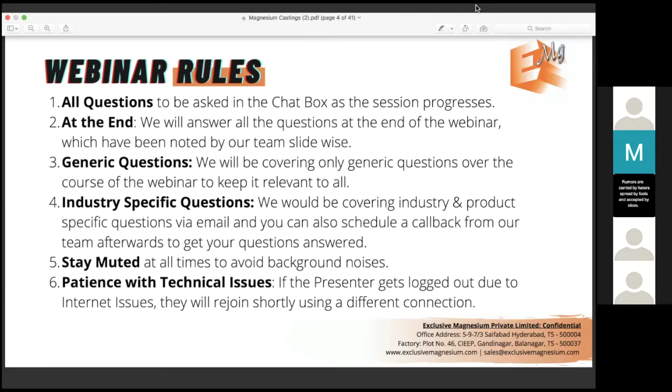We won't do any chemistry test here, but just wanted to let you know where magnesium stands on the periodic table. A lot of customers, when we approach them for the first time, ask us what magnesium is, so we thought we'll mention it up front. It's a structural material that is being used abundantly. It's an element which is very abundantly available in the Earth's crust. It is extracted currently through minerals and even through seawater extensively globally. It's the third most commonly used structural metal globally, and it's 100% recyclable. Even the waste product that comes out of a lot of the manufacturing can be used in other industries for other purposes.

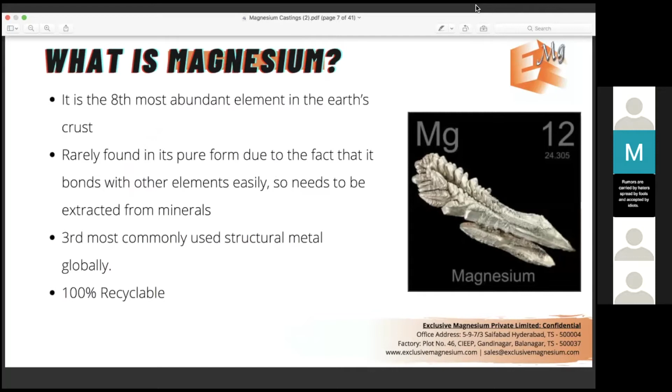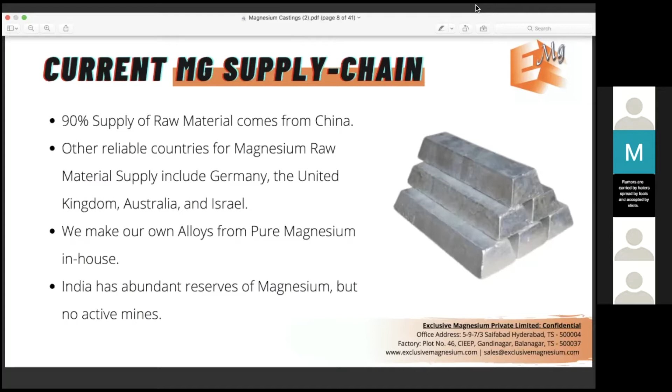So the current supply chain of magnesium, I'll cover this a little bit. 90% of the supply chain of raw material comes from China. The other reliable countries for magnesium are Germany, United Kingdom, Australia, Israel. There are a lot of options for alternatives, but 90% of the complete raw material is currently extracted in China, so they are the major source for this industry. We also, in-house, make our own alloy. So if we use pure magnesium, we combine it with the other elements to make the commercially viable alloys that are used for production. We're able to do that within India itself. India has abundant reserves of magnesium, but there are no active mines, so hopefully in the next decade, if that does come up, magnesium prices would definitely drop.

So when people talk about magnesium, they're not really talking about pure magnesium. Magnesium is then alloyed into different commercial grade alloys. When you talk about magnesium, they're usually talking about the commercial grade alloy, and they refer to something like AZ91, AM60, ZE41. These kinds of terminologies come in when you're talking about magnesium. I'll cover the three major series of alloys that are currently available in India, which you would have to deal with if you're getting into magnesium production at any point, or you're interested in magnesium, and the nomenclature, like how do you recognize what that means.

So as you can see from this presentation, this is the AZ series, where A stands for the highest alloy content in this alloy. On the right side you'll see a chart, a list of the alloying elements that can be used in magnesium, and you can use that to decipher what A means and what Z means. So that's aluminum and zinc.

The 9 and the 1 stand for the highest content. Nine, the first number, stands for the percentage of aluminum, the first element, the highest alloy content element. So that's 9% aluminum and 1% zinc.

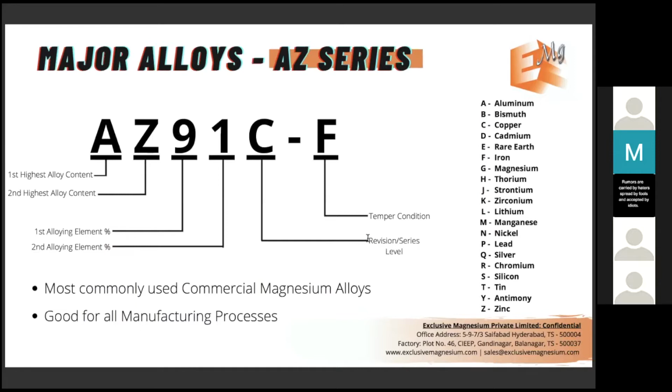And C stands for the revision series level. The alloys are constantly revised and the composition is improved constantly. So currently we are at AZ91E, but C is also commercially viable, D is also commercially viable, E is the purest form of that alloy, so that's also viable. But that's how you would recognize the alloy names. And F obviously is the temper condition.

So the AZ series is the most commercially used magnesium alloy in India and globally, and they're used for almost every industry, every use case. You would first consider AZ91 and then you would go to the others usually.

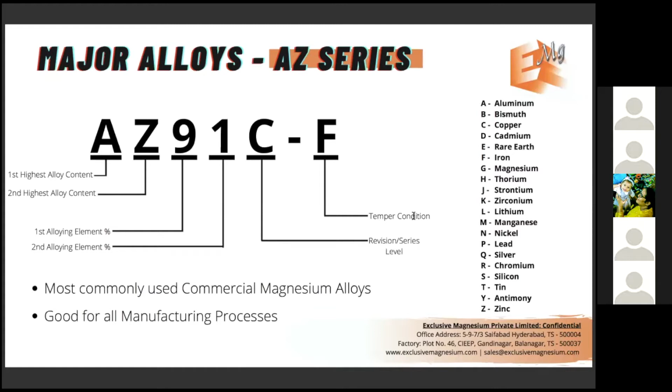The second is the aluminum manganese series, which is the AM series. This is extensively used in automotive and impact critical use cases. An example would be helmets, or steering wheels in cars. These are usually used with the AM series because they have very high damping capability - shock absorption, vibration damping, dent resistance.

So these are the use cases this series is used for. It also has very high elongation, so for alloy wheels - probably one more use case you can see.

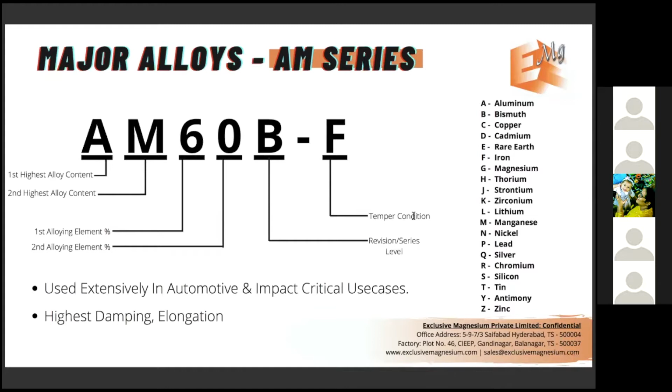The third major series used in magnesium globally are the ZE series, which is the rare earth series. So ZE is zinc, and E stands for rare earth.

This alloy is majorly used because other alloys of magnesium have lower creep resistance - at elevated temperature they're not great materials for engine use cases and things like that. So the ZE series, or the rare earth series - there are a bunch of rare earth alloys now which are used specifically for auto engines, aerospace use cases, which would be subjected to elevated temperature and need to maintain a certain amount of strength even at that elevated temperature. So anywhere between 200 and 350 degrees, you would get great strength from these alloys.

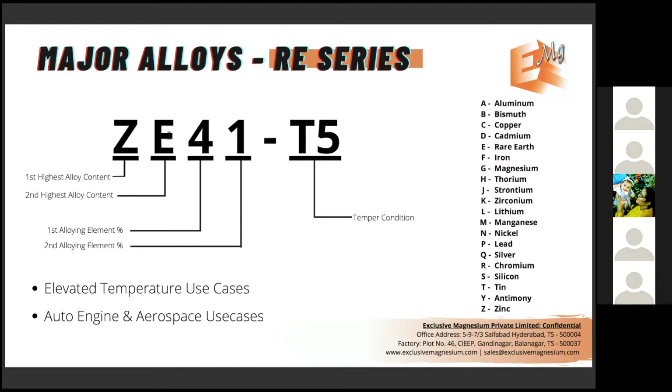So we'll quickly move to the advantages of magnesium alloys. I'm sure you must have heard, even with basic research, that the main use case of magnesium is lightweighting. The reason lightweighting is important is because the density of magnesium is significantly lower - it is 33% lighter than aluminum and almost 75% lighter than steel. That's one of the major primary use cases why people usually consider magnesium.

The second major property that customers are interested in is the high damping and shock damping capability of magnesium. Not only will it prevent damage to the equipment on drop, when it drops to the floor or during a crash, it's basically used in almost every vibration damping equipment.

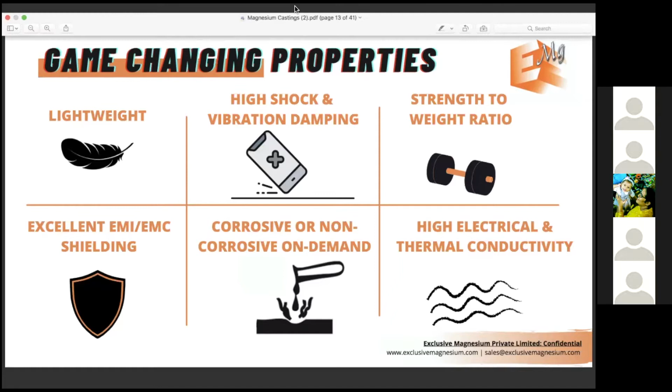Uh, I think someone needs to mute themselves. If anybody mute yourself.

Okay, sure. The third is strength to weight ratio. So even at very thin walls, you'll get very high stiffness with magnesium. Aluminum usually is recommended to have 1.5 or 2 wall thickness, whereas magnesium can be cast as low as 0.65. We've done 0.65 wall thicknesses, and even at that you get significantly good strength or stiffness, which is required for the use case.

Obviously, EMI shielding is an important secondary property that our customers require for electronic use cases. And a very interesting use case for magnesium comes with corrosion.

Magnesium can be made either corrosive or non-corrosive on demand. Currently, there are coating vendors that guarantee lifetime warranty on non-corrosion with magnesium specifically. And there are some use cases where you would want to make magnesium more corrosive by adding a few elements which will help the composition corrode faster.

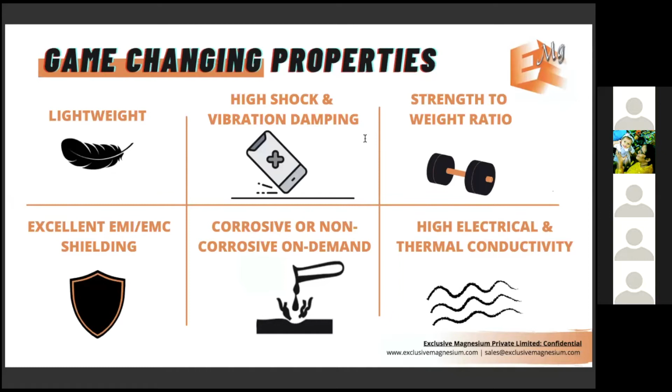Why do our customers approach us? I thought I'll cover quickly. Most of them are looking at meeting the industry customer demand trend. For example, they see that tablets are going down and customers are demanding lighter tablets, so they approach us while considering magnesium as the enclosure.

Or say they see a rugged laptop manufacturer. The second one is comparative advantage, where a rugged laptop manufacturer sees that their competitor's laptop is way lighter, and they would want to meet that, or be the first player making lighter rugged laptops. So as a comparative advantage, they approach us.

The third is where industrial equipment has a moving component subject to wear and tear and energy consumption. In such cases, a lot of machinery we provided heavy components made out of magnesium to reduce the energy cost, and also to improve wear and tear. The final one is something like the drone sector.

Compliance and standards are more related to emission standards, or weight limitations set by the industry. In the drone sector, there used to be guidelines that compliance and approvals are easier for drones when they're lighter, under a certain weight limit. So lightweighting becomes a priority at that point.

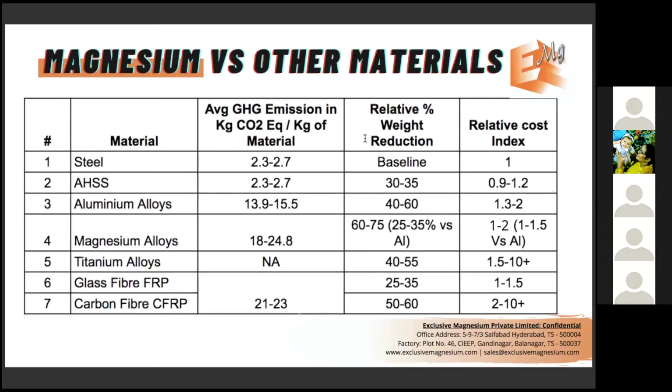So yeah, I just thought I'll quickly show you this slide. I'll keep it here for another 10 seconds.

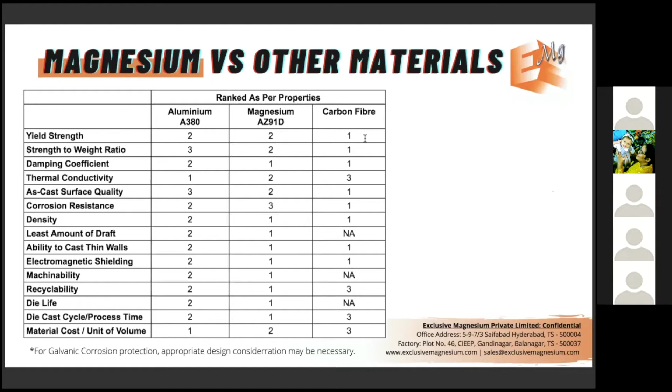When you look at ability to cast in thin walls, the least amount of draft during production, electromagnetic shielding, machinability, recyclability, die life, and the processing time it takes in context of die casting, that's definitely better for magnesium. I'll just stay on the slide for about 10 seconds so that you can go through it.

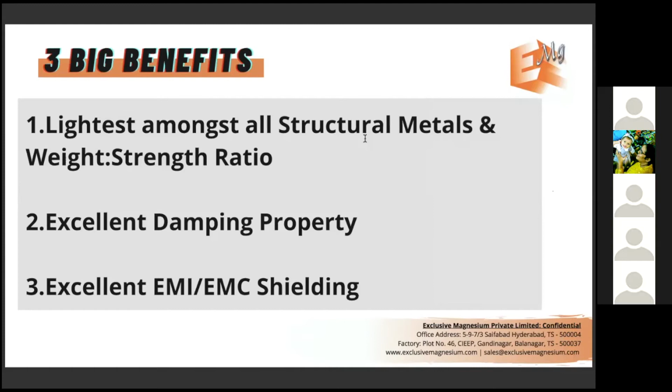So the three big benefits, I'll reiterate them so that you're clearer, and give you examples for each. The first one being lightweighting and weight to strength ratio: 33% lighter than aluminum, 75% lighter than steel. One example from industry is the Boeing 767, which saved 37,000 liters of fuel per year for every kg of magnesium it replaced with aluminum components. That's a major cost saving that is possible through something like that.

So that's one way we've looked at how lightweighting is being used by different customers. If you go back and Google the top 5 laptops of last year, take the name of the laptop and check what chassis it's made out of. Inevitably you'll see the majority are made out of magnesium chassis, and that's a global trend - globally best-selling laptops are starting to be made out of magnesium alloys. I believe customers will start demanding this in India too, and we've already seen it happening with a few consumer electronics companies we work with.

The last lightweighting use case is the wheel rim. Currently the standard in India is the aluminum wheel rim, but globally magnesium wheel rim is the go-to alloy. It offers anywhere between 5 to 7% increase in mileage, 4% plus improvement in braking and acceleration, and also a longer life for suspension and brake components. This is another lightweighting use case that automotive has figured out.

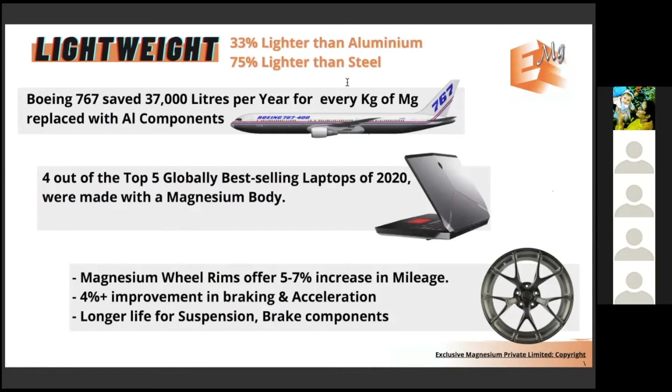Damping - I'll give three quick examples. First, vibration testing equipment. When you're making an electronics product, you want to do vibration testing for your component. Every vibration testing machine's components are majority made out of magnesium, because it offers significantly improved controllability, reduction in resonance amplification, and more reliable and accurate test results. Armatures, fixtures, slip tables of this equipment are made out of magnesium for its damping capability - almost every vibration testing machinery company in India takes some component from us in magnesium already.

When you look at laptops and rugged laptops, one major place where damping plays a role is protection of internal electronics. You're trying to make your laptop drop resistant and shock resistant, so there's no damage to internal electronics even during a drop. The difference in damping between aluminum and magnesium is significant - most alloys offer anywhere between 30 times to 100 times better damping than aluminum. That's something you should consider.

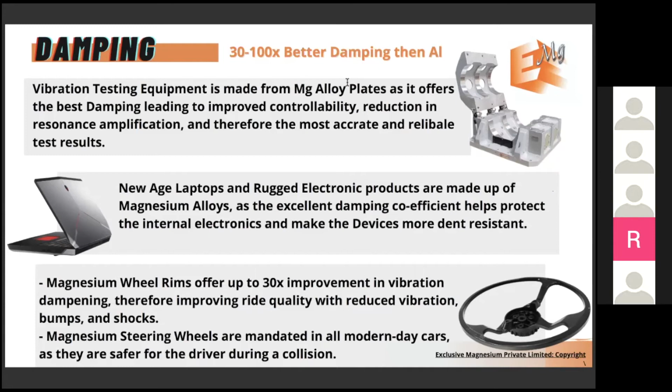Third, EMI EMC. Magnesium offers the best wall thickness to shielding ratio. Medical equipment has standards for controlling radiation and maintaining EMI EMC shielding, which is why magnesium is a globally go-to material in medical devices. Any IoT product, or even a drone, deals with extensive radio frequency interference, so magnesium offers a very good solution there. For the past 25 years we've been working with DRDO and ISRO labs, making enclosures for them, with EMI EMC being a secondary property requirement throughout.

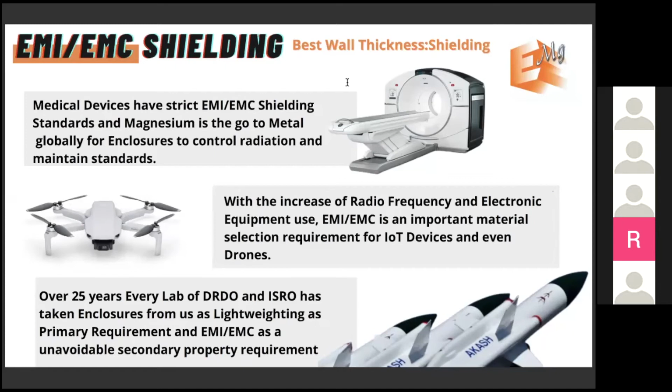Okay, the four misconceptions people talk about - I have to address this with almost every customer. One is about cost, that they believe it's too expensive. They believe magnesium corrodes too easily. They believe it burns easily or is a fire hazard, or raise concerns about creep resistance. That's the four major ones.

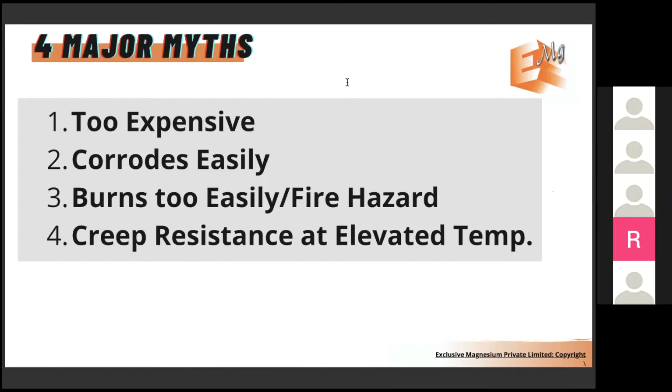If you look at cost, I'll cover it in four elements. One is the raw material cost comparison. Even though in this chart magnesium is slightly higher than aluminum and zinc, I chose magnesium, aluminum, and zinc because these are the three die casting alloys - structural component die casting alloys - so I thought it would be a good comparison. At the bottom you'll see the rate of casting as well, and there's a major overlap between all three. For sure, magnesium will be slightly more expensive at the die casting rate, but if you look at the raw material cost comparison, they're fairly close, even though magnesium is slightly higher.

If you look at the past decade of raw material cost fluctuation, you will see that magnesium is the most stable. Relatively, it has stayed stable and at the same price for the past 10 years, and it has not changed significantly. Whereas you'll see major fluctuations in aluminum and zinc.

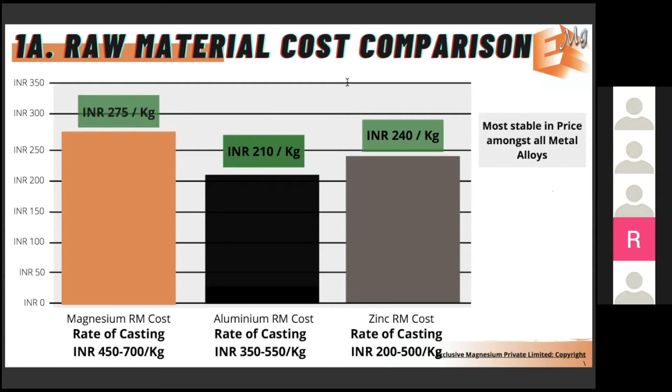So that's one aspect. In terms of production, if you take 1 kilo of magnesium, you are able to make three parts. What that density difference really means is that with aluminum you are making about only two parts, and with zinc you are making less than a part.

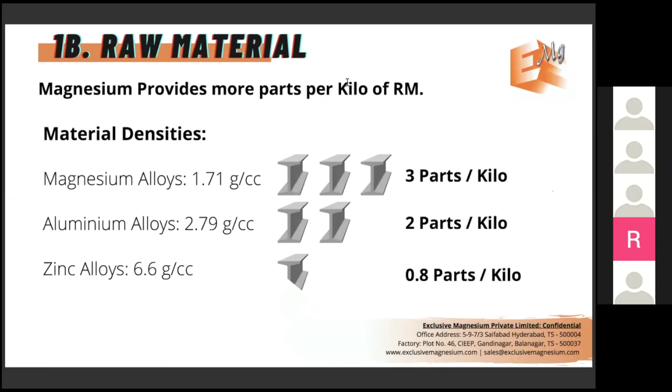So that's just how much better raw material can be used. Whereas the same raw material that is bought for higher cost, there's cost saving that happens during production in that way. The third major advantage in terms of cost, and this is more in terms of die casting, is that magnesium does not have any affinity to steel, hot die steel, and they are able to offer at least 2x or even 4x the amount of die life that aluminum offers for die cast.

So on an average, we promise customers double the die life than they would have got with aluminum, and that'll be almost 100% true every time.

And that itself, if you are a part of an industry which requires high volumes of components being produced, which go higher than say 1 lakh components of the same component, then directly you save almost like 10 lakhs. In this case, let's assume the die costed about 10 lakhs, which is like a reasonable price for a large component. You'd save easily about 10 lakhs right there.

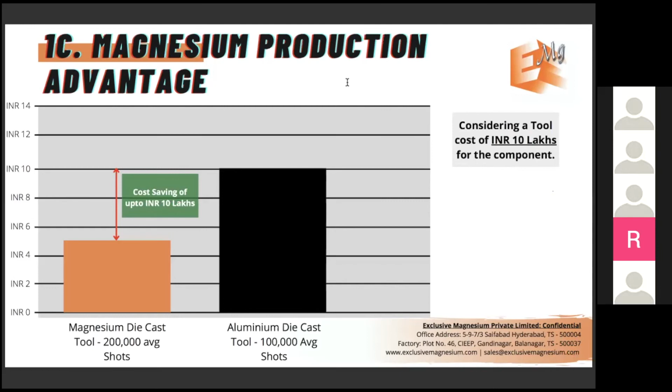The final part in terms of cost, I will cover in terms of stiffness. So this is if 1 kilo of metal is used in magnesium to create equal stiffness - this is the weight of the components at equal stiffness. So say something that would give you equal stiffness in magnesium in 1 kilo, you would require 1.8 kilos in aluminum, and you need 2.1 kilos in steel.

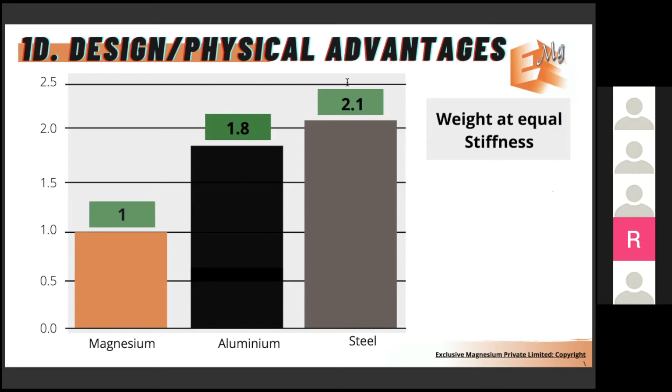So that's also one place that in terms of reducing wall thicknesses, you could also save raw material and price. So all these methods we've mastered over the past 25 years, and we help customers whenever they are open minded enough to approach us for transitioning to magnesium. That's something we help them with.

In terms of corrosion, someone had a question about corrosion just now in the chat box a while back. So this is just a presentation, a study that was conducted - a 10-day salt spray test conducted as per ASTM B117. This is not conducted by us, this is by a third party, and you would see that magnesium AZ91D has the lowest corrosion level in comparison to the other two options that are available.

So this is one reason why. The reason I'm mentioning it is because a lot of the understanding of magnesium comes from older data about magnesium, the capability of magnesium alloys. Whereas with the revision of the series of the alloys, the more purity we were able to create. Like say, iron, nickel - there are components in alloys which create that corrosion effect in magnesium. And when you remove those out of magnesium, they no longer are corrosive.

So now there's mastery in people understand how to remove those corrosive elements from that magnesium alloy and give you better corrosion resistance. And the second one I also mentioned about corrosion is that now in terms of coatings have become so good that there are companies that offer a lifetime warranty on coating for magnesium that we work with. One example being indestructible paints - that's one that gives a lifetime warranty.

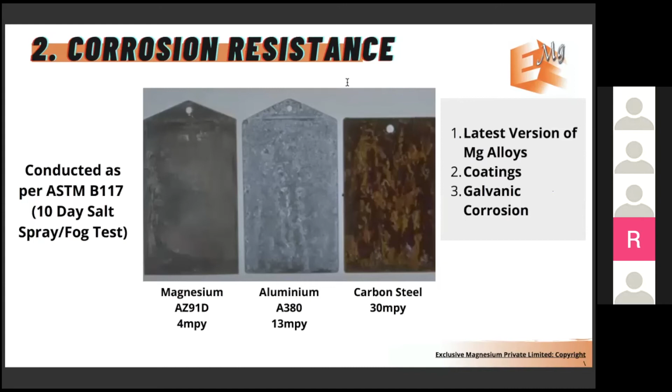The third major myth that we hear a lot about is the fire hazard. So one thing you should know is that magnesium is only dangerous when it's in its molten state, and when it's in powder state. Powder state, you would know, it's used in crackers. So that's majorly a powder form that is created and that you're lighting.

When you look at molten state, when it even comes in contact with moisture, it explodes. It has an exothermic reaction. So there's high technical skill and know-how that is involved. Over the past maybe 3-4 decades, people have seen a lot of magnesium fires in magnesium foundries itself, and that's usually, when you investigate that, it's usually a lack of process and standards being maintained in terms of magnesium melting, or something silly being done essentially.

The second thing about fire hazard - people are concerned that if they just buy a roll plate and machine it, will it catch fire? Yes, when creating machine scraps, it is important to clear out the complete bed of any magnesium powder, scrapings, turnings, and chips that have been created. They have to be cleared out and kept away from the machine, because there have been incidents of people not maintaining basic safety standards when machining magnesium, and there have been fires that happened in India because of this.

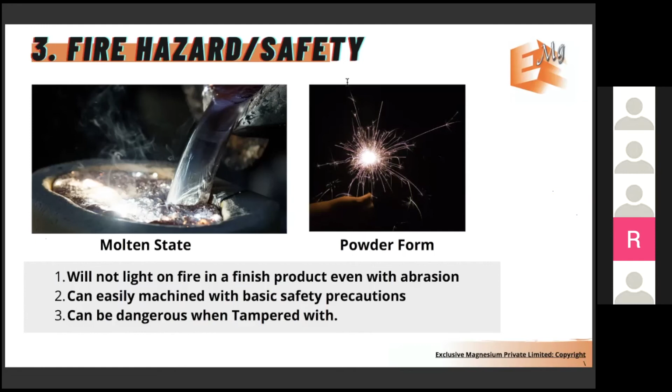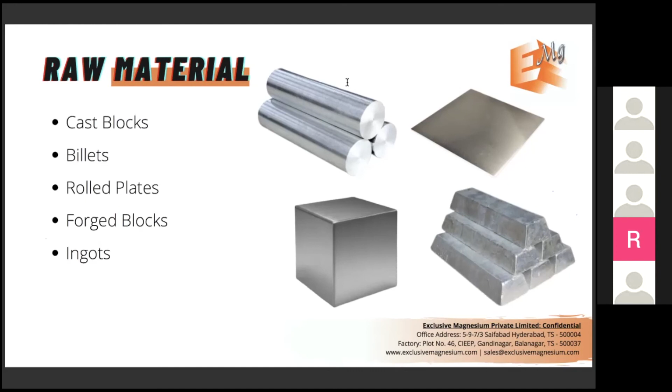Now, manufacturing possibilities. Just like aluminum, magnesium is available in cast blocks - both forged blocks and cast blocks. Then we have billets, forged blocks, roll plates, and ingots. These are the forms usually available in the market, same as what you'd find with aluminum.

These are all the various processes we've done for magnesium so far, and we're capable of doing in-house, available in India if you require. High pressure die casting, obviously for high volume production. For lower volumes, there's gravity casting like sand and permanent mold. We also have centrifugal castings, and we do machine parts - taking a forge block or roll plate and machining it out. We can do extrusions - we're the only company in India that can do magnesium extrusions. We make roll plates in India itself to reduce raw material cost, along with forging and sheet bending. That's all the processes we've established over time.

We're also currently working on investment casting and closed die forging. The forging I mentioned earlier is hammer forging, or just making blocks - closed die forging is something different we're currently working on. For these two projects, investment casting and closed die forging, within the next quarter we'll probably have a process defined with all necessary quality standards to give you repeatably high quality product.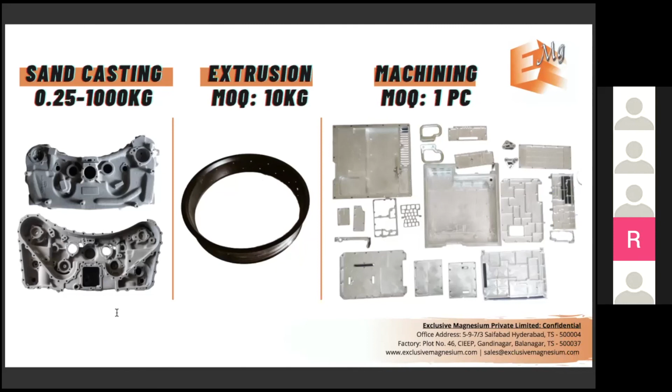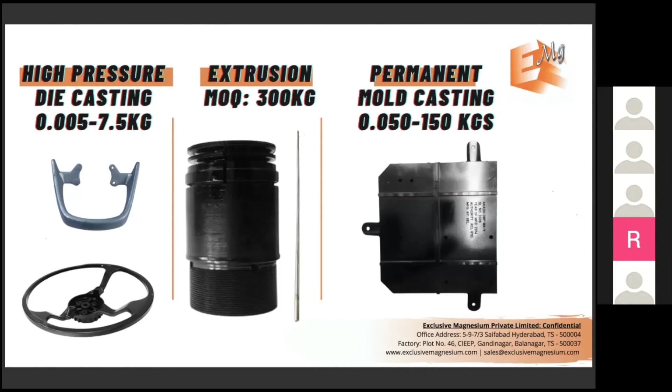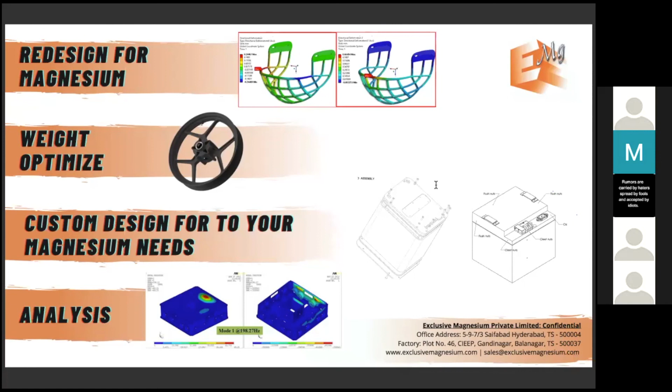If you have a specific question related to your industry, you can always email us at sales@exclusivemagnesium.com. We respond as quickly as possible usually, so you can always email us there.

If there's a component that you believe is worth considering for magnesium, or you want to understand whether it makes sense manufacturing-wise in magnesium or not, you can send us a performance critical component, and we'll give you a budgetary estimate and tell you the manufacturing feasibility of that component. That's obviously at no cost, and we encourage it. Even if you're just exploring it, we are very open minded. You can just send us the drawing and we'll help you understand whether it makes sense in magnesium or not, with no commitments as such.

And the third would be, if you want to schedule a discussion or a meeting to discuss your industry and your product priorities, and whether magnesium makes sense at all for you or not, we are always available for a call. I'm just going to go to the next slide where you'll see my number.